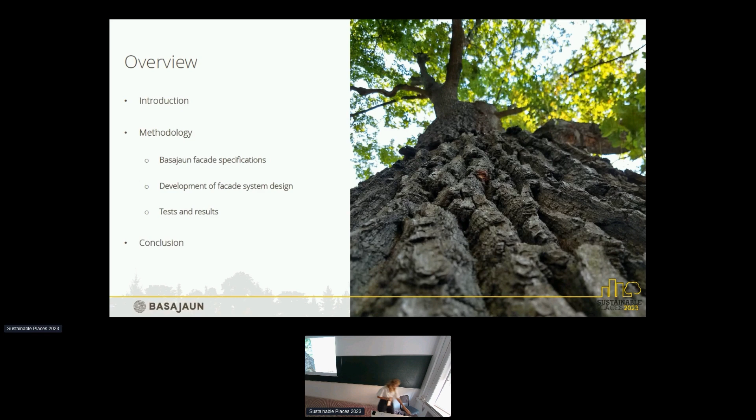Let's start with Basajaun. It's a European project that started in October 2019, and it's towards the end because it will finish next year, in March 2024. It's a really big consortium with 29 partners spread across 12 different countries in Europe. The coordinator is Tecnalia, and the person in charge is Javier Garcia.

In this project, the role of Focchi is to develop a curtain wall facade system including bio-based materials, because as you know, the standard for curtain wall facades is aluminum. In this project, we wanted to use an alternative material for this kind of system.

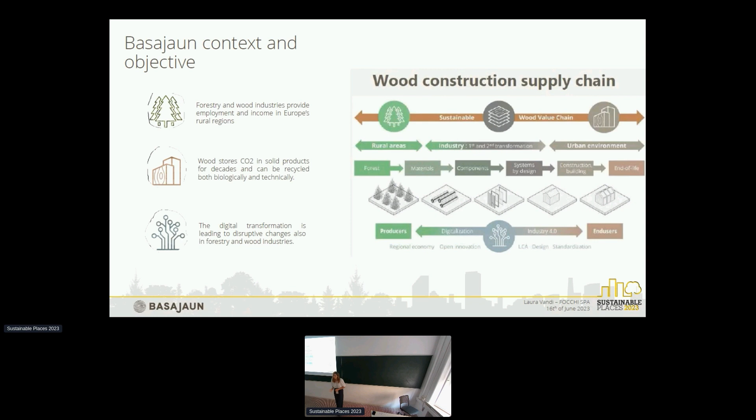What is the objective of Basajaun? It has a lot of outcomes, but the main objective is to boost the use of bio-based material in the construction sector. Today I will talk especially about the facade system, but the goal of Basajaun is to address the whole construction value chain.

In this presentation, I will talk about the innovation we developed, a bio-based facade, and how we will install it in a real demo building.

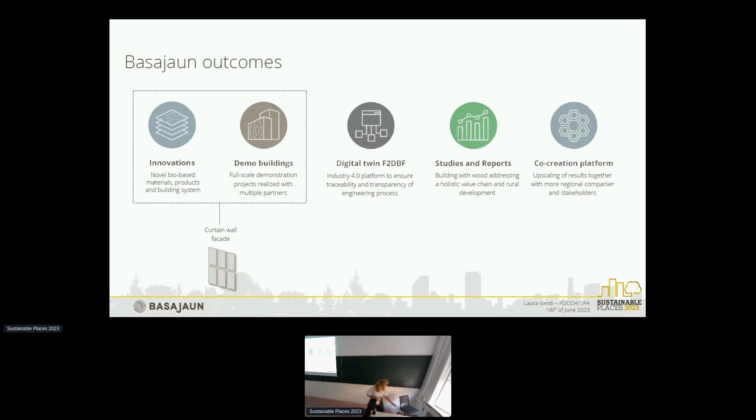Okay, let's talk about the methodology. You can see here how we divided the project. The first phase is the most crucial one, because we identify all the facade specifications - boundary conditions, objectives, requirements, and goals and targets we need to address. Then the core activity is the development of the facade system itself.

The third phase is testing and results, because in order to validate the facade system, we had to conduct tests to validate and verify its feasibility. We conducted performance mock-up, acoustic, and fire tests, but I'll go through all of that.

Just for context, before starting the design phase, we analyzed the state of the art and the needs. We were asked why we need to develop a bio-based component. All of us know that the construction sector has the highest energy consumption percentage, and also 30% of solid waste is due to construction.

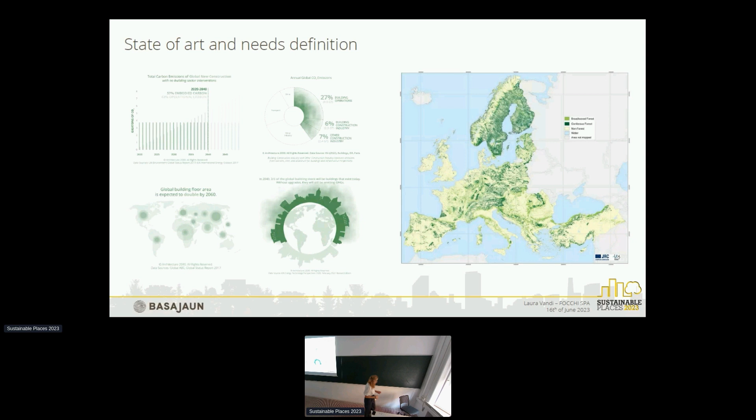So what we wanted to try is to replace or find an alternative to aluminum, because nowadays traditional curtain wall facades are made of aluminum. I'm not saying aluminum isn't sustainable - it has increased its performance a lot, for example with a high percentage of recycled aluminum. But in this project, we wanted to investigate an alternative to aluminum.

What are the objectives and the role of the facade? The facade system is one of the most important building components because it's responsible for the division between indoor and outdoor spaces. It provides safety to people and also gives aesthetic appeal to the building.

We can summarize three main objectives in these boxes. The most important is to industrialize the process and manufacturing of the facade. In the design phase, we needed to consider this requirement to make transport and installation safer and easier, in terms of dimension, weight, and workability.

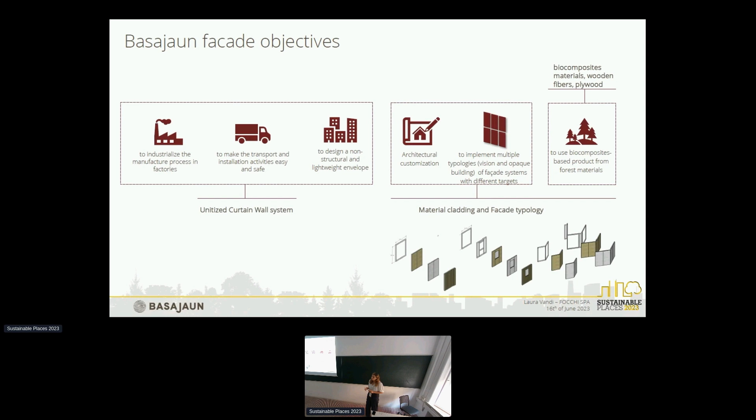The third requirement, as I mentioned before, is to introduce bio-based materials. The second phase analyzes the boundary conditions - requirements that are compulsory to consider in order to address the performances needed across all countries. So we conducted a deep investigation all around Europe.

Okay, let's start with the second phase of the methodology, the designing phase itself. As you know, the curtain wall facade is a lightweight facade system without a load-bearing structure. It has its own frame with perimeters, and it's literally hanged to the ceiling of the building. One of the main important components of the curtain wall facade is the frame.

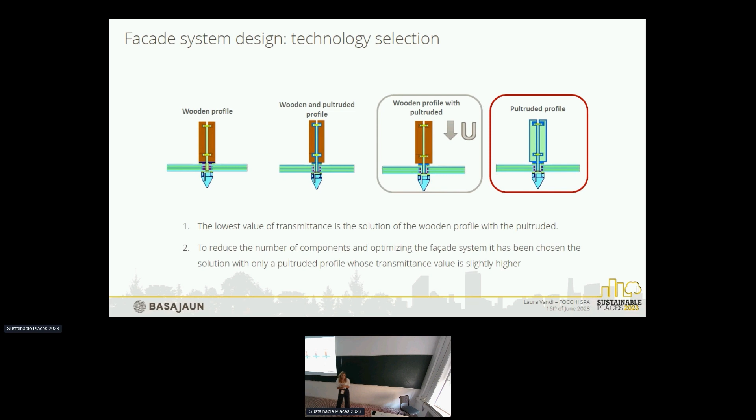But we selected the pultruded profile, because the differences in transmittance values were really low. So we decided, in order to address the requirement of industrialization, to reduce as much as possible the number of components, because if we produce 1,000 square meters of facade, having multiple solutions instead of one single solution will increase cost and time a lot. So it's crucial to understand how we need to address all these requirements.

I want to spend some time on the bio-based component, because this is the most innovative part of the facade. On the right, you can see the section of the bio-based component, manufactured by a Hungarian company together with Amplas and Omicron, two partners of the consortium. After trying a lot of materials, this is the final composition.

This profile, the section of which is really similar to the aluminum one, has some differences, but we could use it as a profile for the curtain wall facade. It's made of wooden fiber and basalt fiber for 60%, and these fibers are kept together with resin.

We wanted to increase the percentage of bioresin a lot, but this is one of the features that will be improved, because in this part the resin is not just bioresin. We needed to add some plastic as well.

Another difference from aluminum is that this profile is not extruded, which is a really high energy consuming process, but pultruded. It's a continuous process that starts from bobbins of fibers. They are kept together, pass through a bath of resin, then through a matrix, and then they are cut. So it's a continuous process to make these bars.

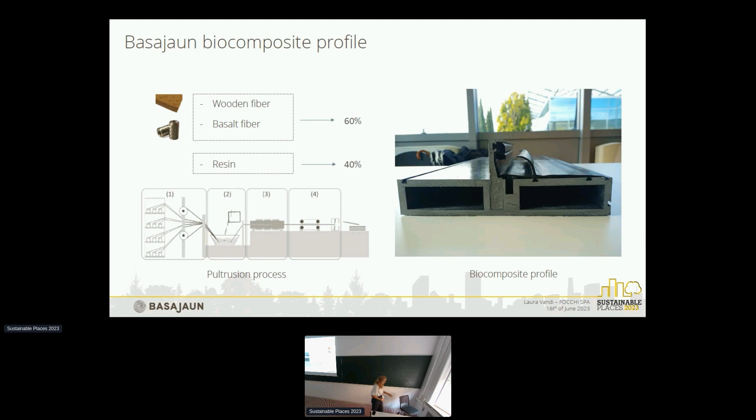The main concept is a structural frame, and from the indoor to the outside we have a plywood which guarantees the fire performance, because we wanted to use just a membrane as a vapor barrier, but we needed this component to address all the fire regulations, since complying with fire requirements was one of the main issues when working with bio-based materials.

So from the inside, we have a plywood, which has fire reaction class B1, a good material. Then, instead of using mineral wool, which is standard for curtain wall facades, we use wooden fibers, which have a really close thermal characteristic. Then we use a membrane, a ventilated cavity, and the cladding. It's a series of layers in order to comply with all the requirements.

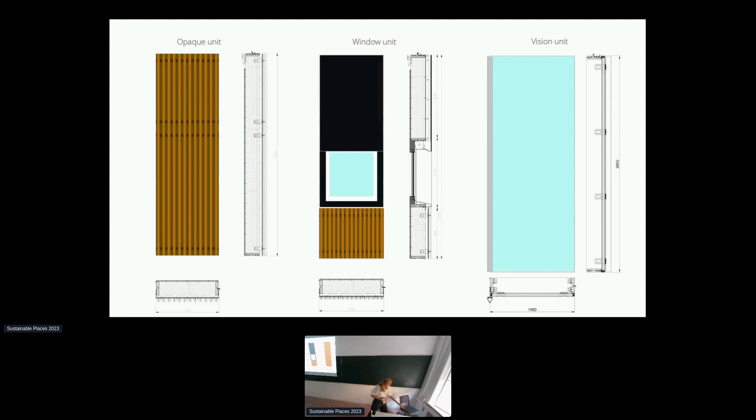Some pictures: in the lower part there is the vision one, in the upper part there is the opaque, right and left, and in the middle there is also the window unit.

Particular importance was also given to making the cladding interchangeable. The opaque presented some wooden lamellas for the French demo, while on the right there is another kind of cladding, a wooden deck, for the Finnish one.

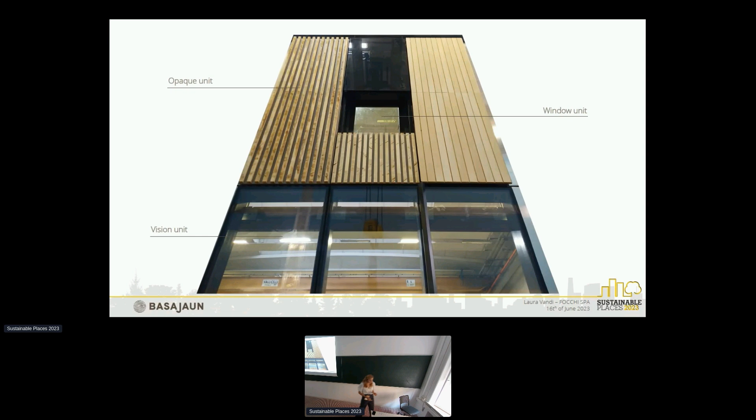And of course some simulation, mechanical simulation, in order to validate the system. ENAR, one of our partners, took the biggest and heaviest facade module in order to verify the mechanical behavior of all the components.

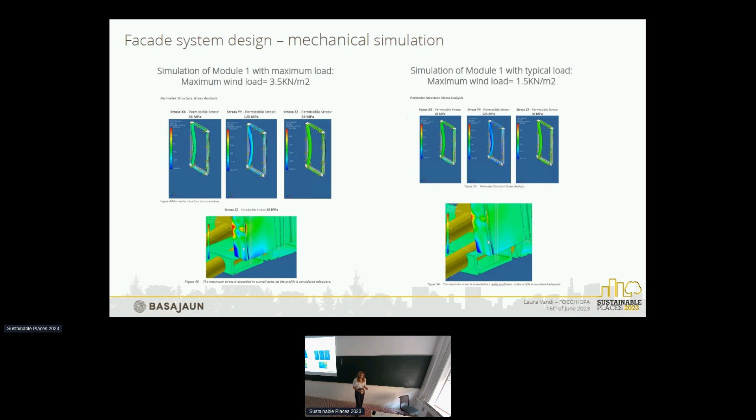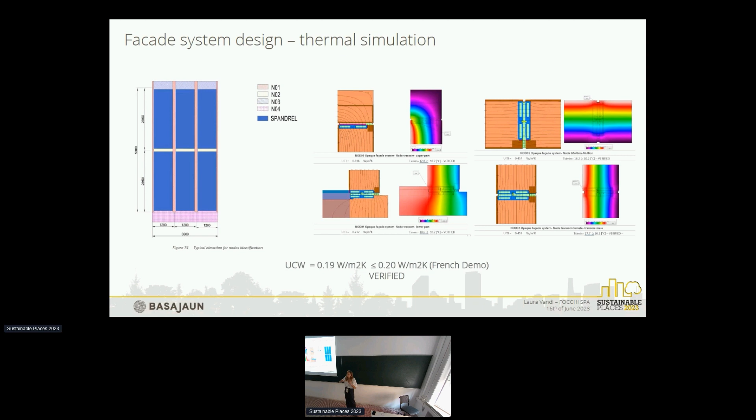And again, also some thermal validation. We took the middle section, but also all the nodes, in order to understand the thermal behavior of the system.

Here you can see the demo building developed by Studio, an architectural firm based in the Netherlands. They designed the Finnish demo as a cultural building, while the French demo is a residential building. We wanted to demonstrate how this solution could be applied to different types of buildings.

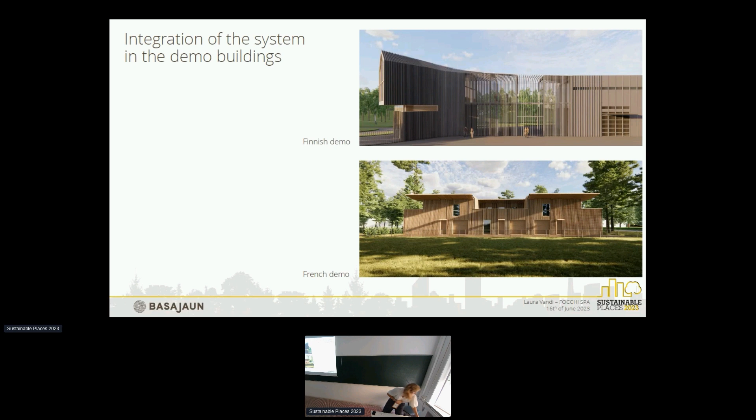The third and last phase, of course, is that once we had designed the facade solution, we needed to validate and test it. So here is the first prototyping phase. I'll just briefly summarize some of the main steps without going too deep.

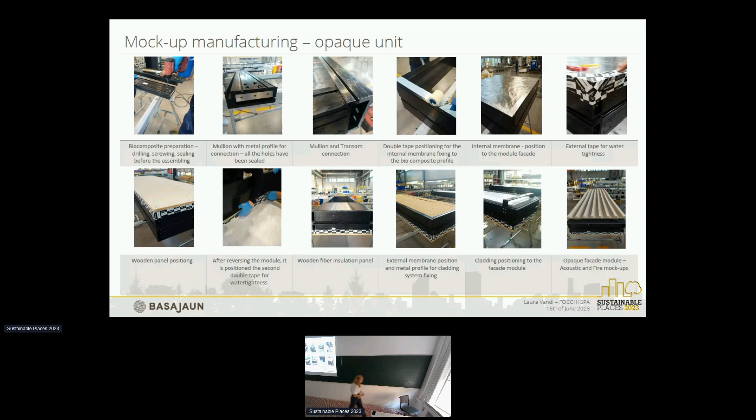In this slide you can see the wood fiber filling the facade module, for thermal transmittance of course, and then the cladding. In the next slide there are the final configurations of both typologies, the opaque and the vision one. The first test we made is the performance test.

The performance test has been conducted at Istituto Giordano, an accredited entity based in Italy, close to Focchi. We designed the performance mock-up to test all the different possible scenarios, so we wanted to understand the behavior of the facade module at the junction between window and vision, and opaque and window.

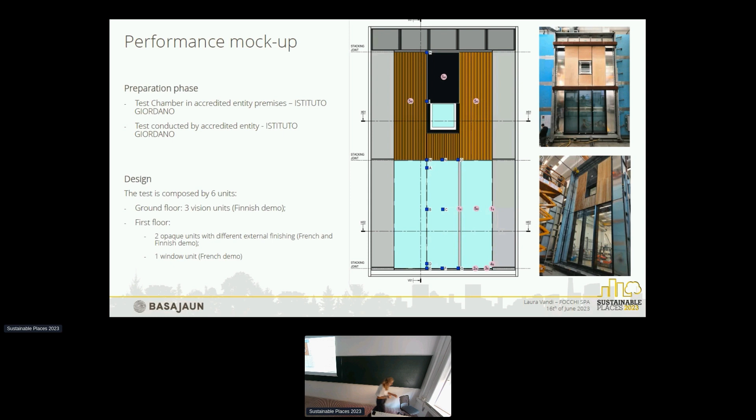So it's tested in order to comply with all the scenarios we could have in a building, vision in the lower part and opaque in the upper part. These are the results. We comply with the standard norms, the 13830 European standard for curtain wall facades. Since this system is considered a curtain wall facade, we needed to comply with it. These are the results, and we pass all of them. What we tested is the air permeability, the wind load, the water tightness, and also the impact.

So it was really important to guarantee the safety for people in order to avoid any falls or damages.

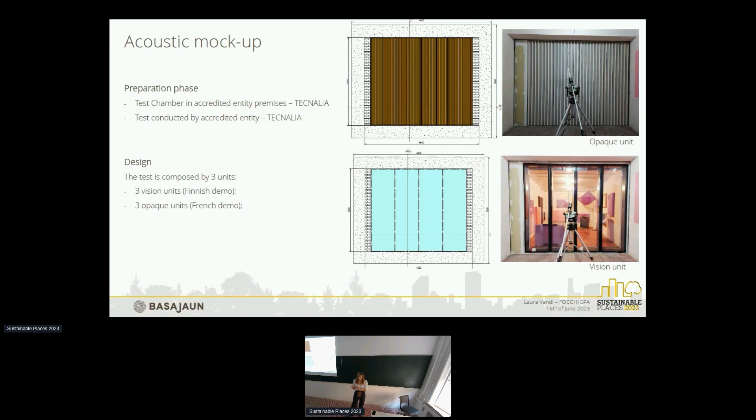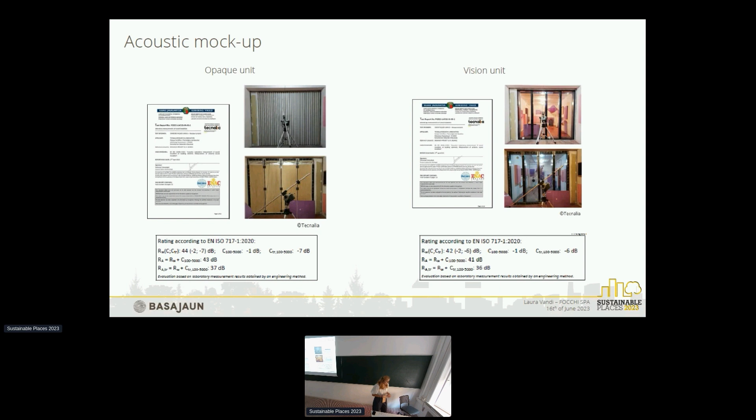The second test we made is the acoustic mock-up for both the vision and opaque parts. This test was conducted in Tecnalia, and we made different tests, one specific for opaque and one specific for vision, and this is the result. In France, we didn't have a really high requirement for acoustics because the demo mock-up is literally in a forest, but in this case we comply with all the requirements, so we were really satisfied.

The fire mock-up, as I said, the fire was the most critical part. So we needed to conduct 3 different tests: the fire resistance, the fire reaction, and the spread test for the facade. You can see some pictures of the results, and these have been conducted for both.

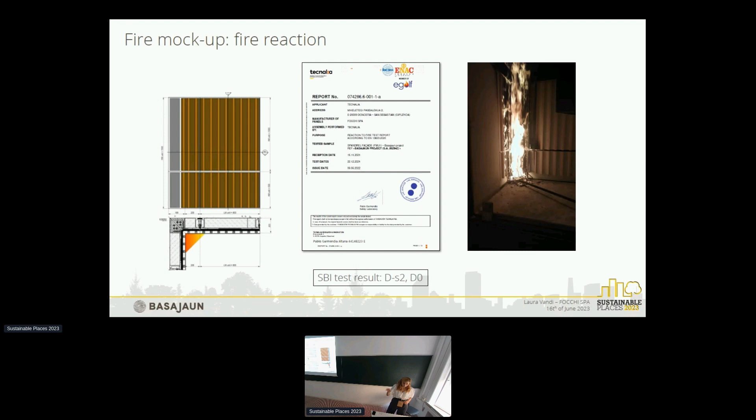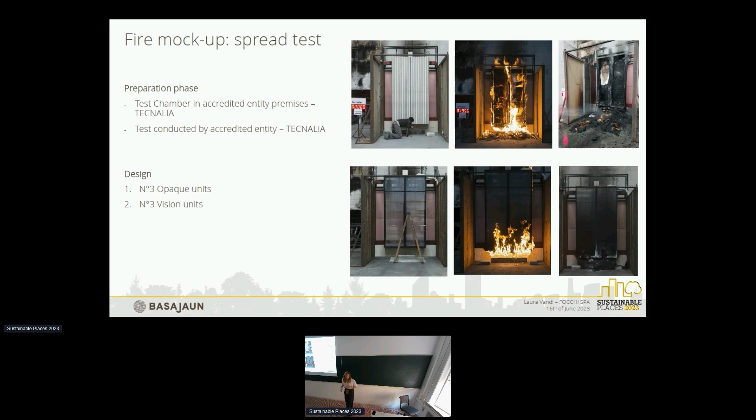But in this slide you can see just the opaque one. This is the fire reaction, the SBI test. It's different from the other because it's made in a particular middle furnace, and the fire goes toward the external part of the facade, while the fire resistance test goes from the internal towards the external part. And here is the spread test, showing how the fire could propagate vertically from the external part of the facade.

So, let's get to an end. We can say that all the results we achieved are completely in line with the facade expectations. We addressed the industrialization, both for the manufacturing line and for the installation part. This facade solution is customized because the cladding could be changed. The same solution could also be applied for different facade typologies, and it is made of various components. So we can say that we are satisfied and we addressed the objective.

Of course, in order to improve, we wanted also to look forward and see, okay, this is the facade solution, but what can we do next, what can we improve after all this process. There are some features we wanted to improve: for instance, reducing the cost, because if we want to scale up the solution, the cost has to be reduced. Also the weight and thickness, because weight is really important for manufacturing — for instance, aluminium, a 4 meter long piece, can be moved by 1 person, while the bio-based component was heavier, so we needed 2 persons to move it. These are all considerations we need to keep in mind for further development.

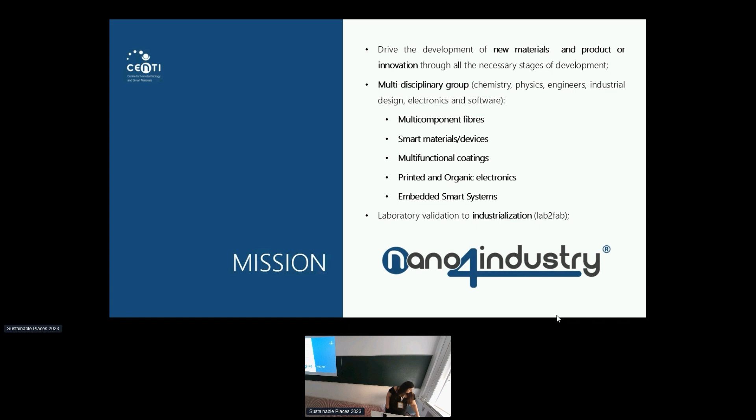As I mentioned, we aim to promote activities around smart and functional materials and systems, and we work with multi-component fibers, smart materials and devices, multifunctional coatings, printed and organic electronics, and embedded smart systems. We also have a lab for prototyping and industrialization of our developments. As a multi-sectorial research center, we work with almost all substrates imaginable: paper, textile, wood, concrete, cork, polymers, ceramic, and everything in between.

Our focus is on materials for sustainable industry, microfabrication and printed intelligence, novel sustainable composites fabrication, and our pilot lines that allow us to upscale our developments. Also nanostructured solutions, energy storage and microgeneration, and automation and software.

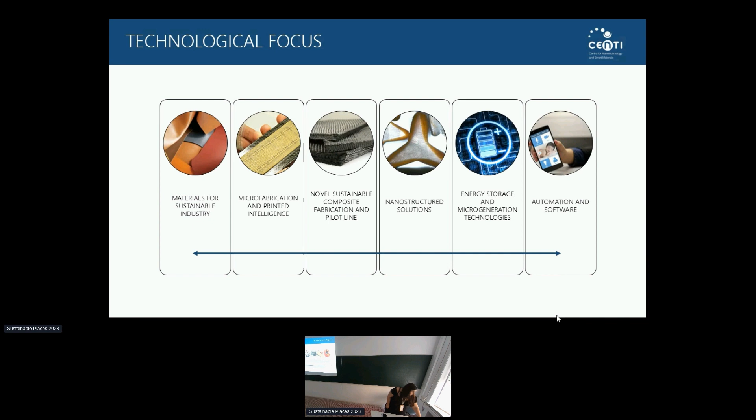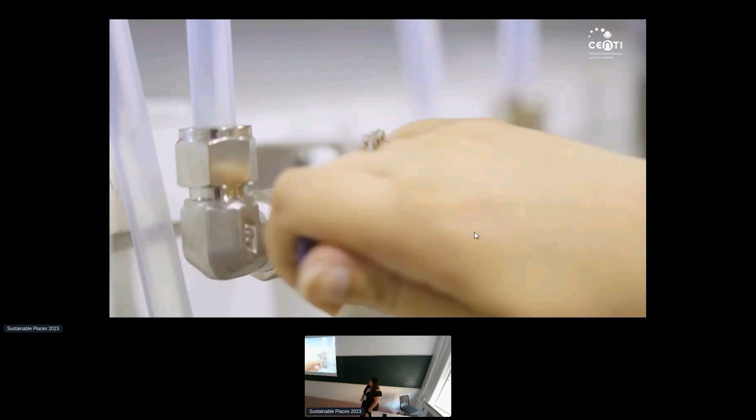I have here a small video about some of our technical capabilities. Here you can see our reactors for small-scale synthesis, our characterization equipment that allows us to validate our results—this one shows results on the skin—our pilot scale reactors, our spray coating line, some of our developments, the plasma technology that allows pre-treatment of materials, and our simulation laboratory that allows thermal studies on materials, simulating the human body inside a climatic chamber.

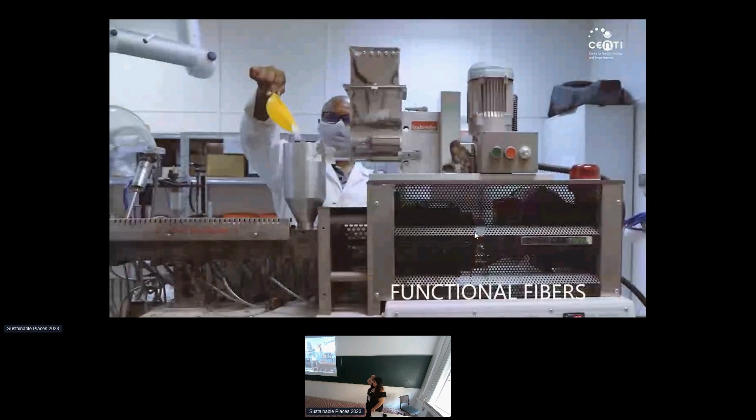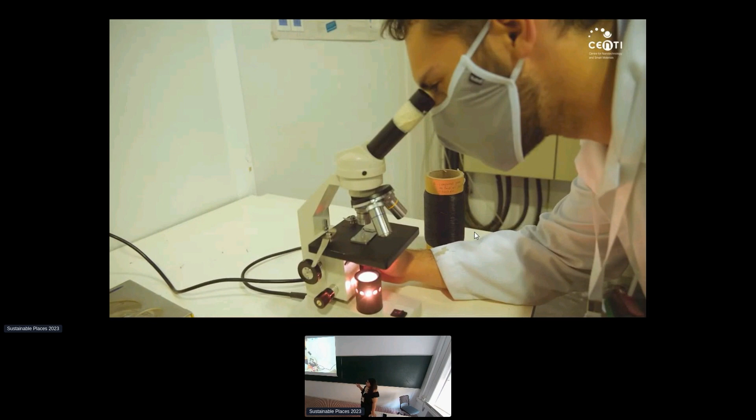We also work with functional fibers and are able to additivate the polymers, which we can then extrude or use to produce fiber. The fiber can be a three-component fiber, and we can also produce polymers for different kinds of extrusion.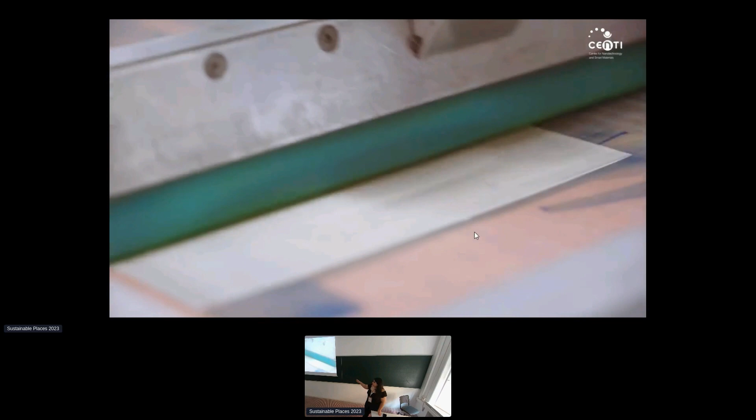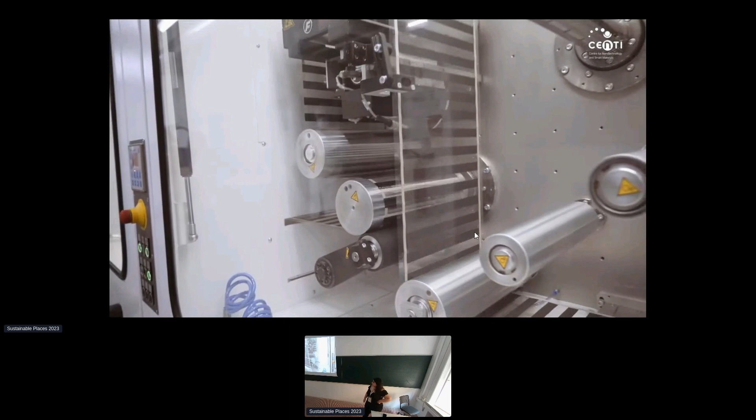We also have smart materials that allow us to do printed electronics and physical deposition of materials. Here we are seeing the preparation of flexible electronics, and we also have a line to allow us to upscale the developments. In terms of non-flexible electronics, we also have the ability to do the hardware and software that accompanies some of our projects. Here we are producing the PCBs that go inside the equipment.

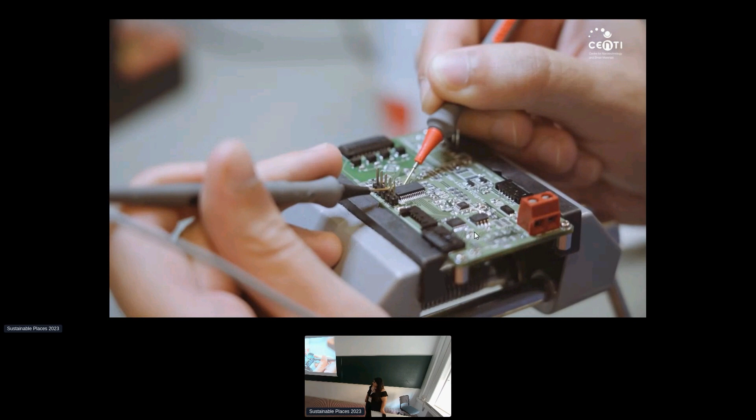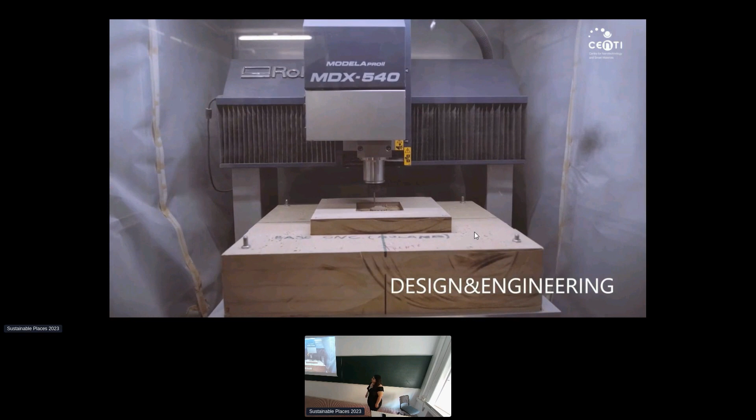And our design and engineering lab has the equipment needed to do the prototyping and production of different demonstrators for our developments.

In terms of numbers, at the moment we have more than 150 collaborative researchers with more than 117 projects running. We have more than 250 active clients, 52 active patents, 20 joint ownership applications, and 5 CENTI ownership applications.

This will allow us to build construction blocks outside the place where we are doing the construction and then bring them there. In this way, we can use more robotic labor and are less dependent on the resources available at the construction site.

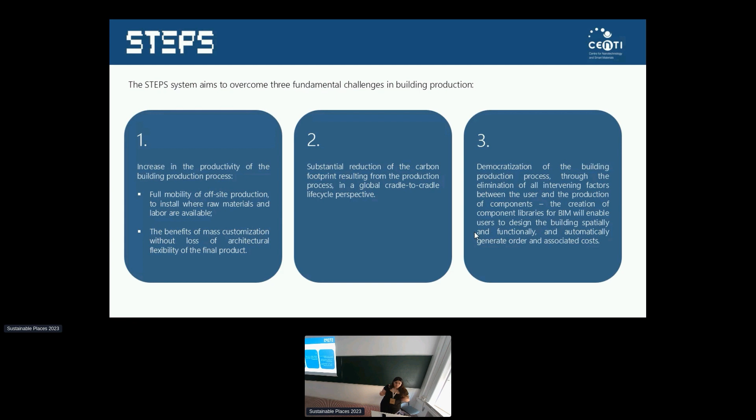We can have a substantial reduction of carbon footprint, which we are trying to achieve using more sustainable materials in construction, and also democratization of the building production process, where we are going to create a components library of BIM, and the user can build this house like we used to do as children building houses with Legos. We can do something similar, and with that automatically generate an order and associated costs, and then the house is shipped to us, and we just need to set it up.

For the interior, we had two OSB layers and the nucleus. We tested two different structures: a monomaterial structure and a laminated structure. We started testing the monomaterial, then tried to laminate it with different materials to try to increase the results. But due to the need for mechanical stability, the laminated facades need to be very small and don't produce the best results.

We also tested different materials. The standard EPS that we are trying to replace, because it was the first material identified for this block. So we studied recycled EPS, done completely with recycled traditional EPS, recycled PET, and EPS Neoplas, which is a recycled material with components of recycled EPS and graphite. We also tried cork, recycled cork, and hemp.

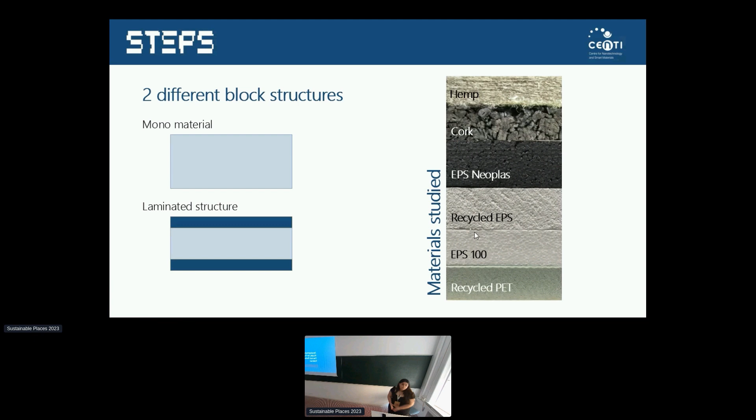So to see which of those materials and structures would be better suited for building the block, we developed a numerical model for predicting thermal performance. Using ANSYS, we developed three numerical models.

Besides that, we also did a 3D model of a room. For that, we used a room with dimensions 4 by 4 meters with 3 meter high ceilings. For this one, we used heat transfer forms of radiation and natural convection, because from our experience these are the most significant ones for this kind of model.

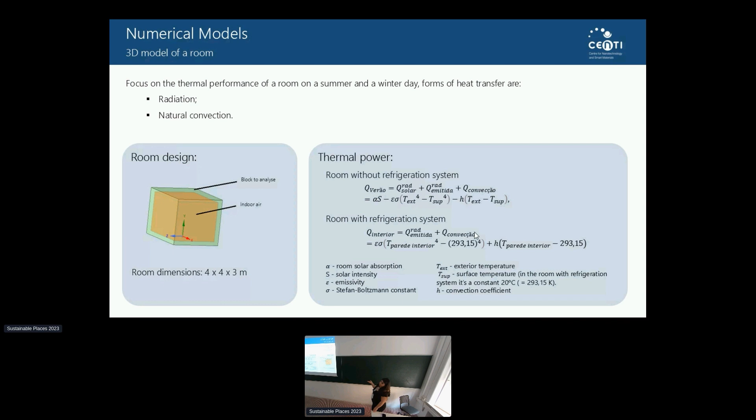In this 3D model, we did two variations: a room without a refrigeration system and a room with a refrigeration system. I'm going to show the results we were able to obtain with the room with the refrigeration system, which allows us to determine the power needed to maintain the room at a temperature of 20 degrees.

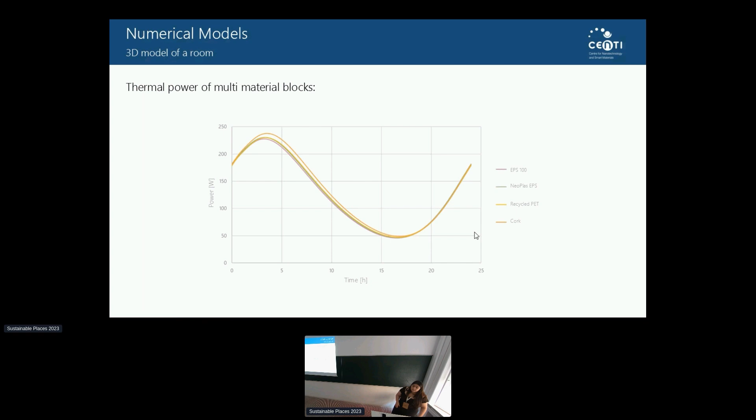We are almost at the end of the project, so these are the results we were able to attain with this simulation. The results were also validated using a methodology we developed at CENTI, which with our climatic chamber allowed us to validate these results. We were able to assess that this material was better than the traditional EPS alternative.

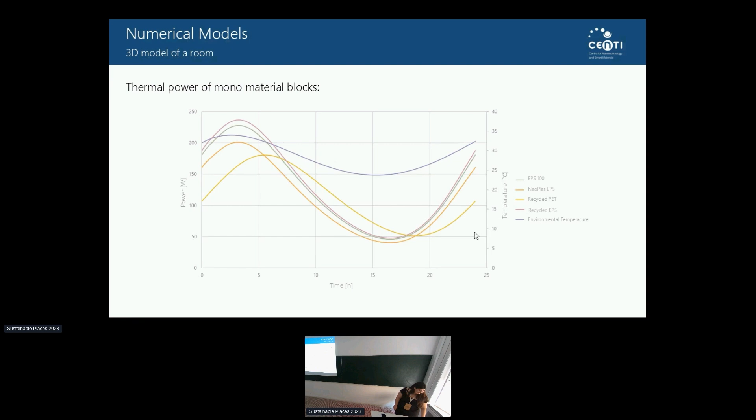Question: Did you do any comparison for price? Yes, we did. The Neopor is slightly pricier, but the company was okay with that. Recycled PET has an even higher price and even higher weight, so the company ruled it out. But the difference is very slim.

So right now the material is being manufactured? Yes, we are doing the demonstrator. Do you have certification of the material, or is this ongoing? The certification of the block as a whole is ongoing, but the material itself, the EPS Neopor, has a fire class A rating, is water resistant, and does not biodegrade, which was also important for the house. The material itself is certified, and we also did our own tests for mechanical characterization.

Another question: do you think that if you change the size or morphology of the module, you can expect better results? Have you made this kind of simulation? We did not have the flexibility to change the structure of the block itself. For example, if we increase the width of the block, the results would be better, especially for the laminated version, because we have a very small laminated width. But the company felt that would increase the difficulty of construction and transportation.

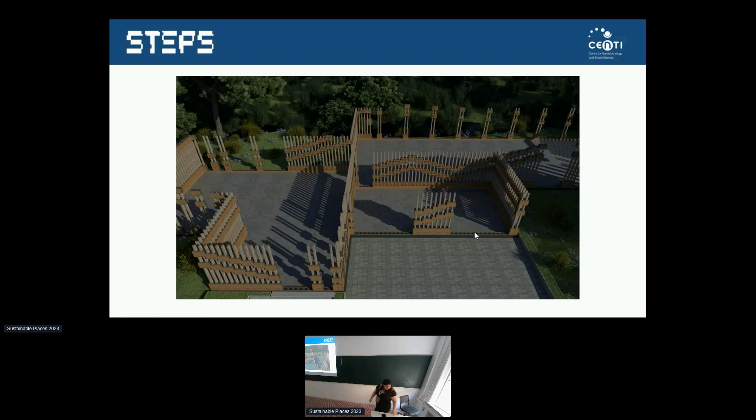But in the junction between different elements, is there nothing providing pressure? No, this can be set up and dismounted with no problem. Water penetration and water tightness is guaranteed by some steps, so they are connected together. When stacked one above the other, they have an indentation that allows them to stack together like Legos—literally like Lego blocks.

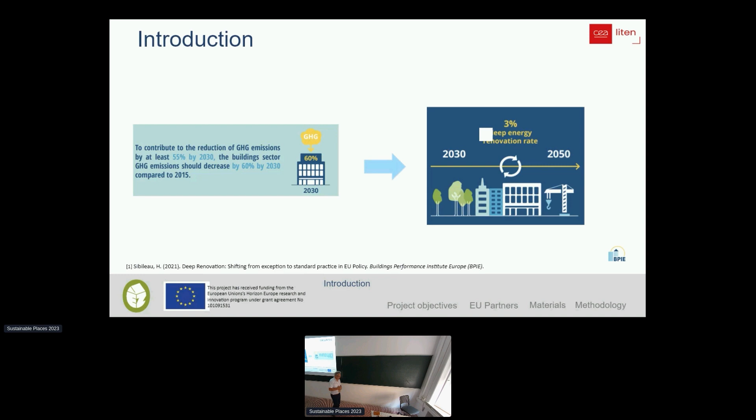So the idea is, we plan to contribute to the reduction of GHG emissions, so we say at least 55% by 2030, but at the end we would like to have some zero carbon buildings by 2050. That means a lot of work and a lot of evolution.

Because we are working also in a solar lab, the idea will be to reduce consumption, but also to increase renewable energy, solar, and we would like to have this kind of zero carbon building renovation.

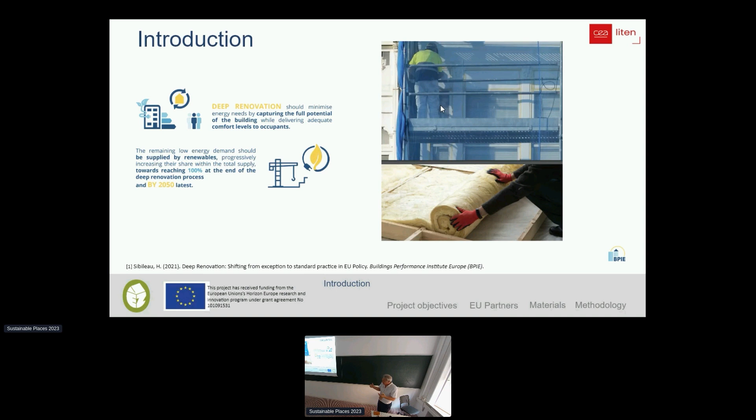That means a lot of insulation, but also PV, and we choose second life PV, because if you want to have a very low carbon footprint, you need second hand PV. Otherwise you will use a lot of carbon also for the PV.

So it's a huge goal, and for that, what we managed was to put together a lot of companies, and we will test the different products. We will see how we can renovate, have a wall component, and the issue is: is it possible to have a real component at the end of the project? That's what we will see during this presentation.

So the different kinds of materials - some are well known like wood fiber, or even VOC paint is more and more known, and insulating filled accessories, some insulation in brick. But we have also some new materials like...

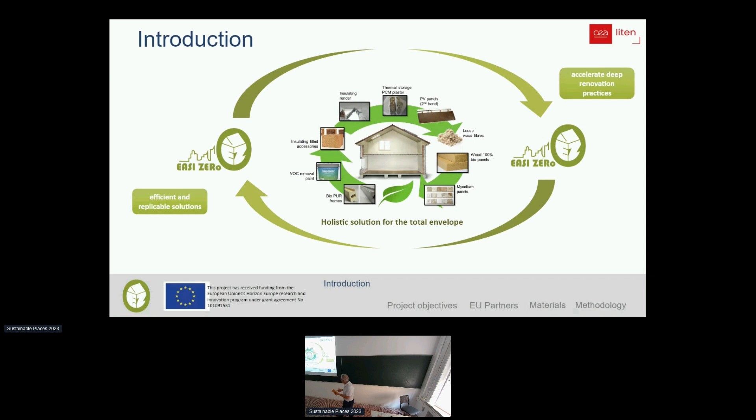Miscanthus. So miscanthus is a very strange material. You can smell it at the end, you will see. But we'll talk about that later - it seems very interesting. Then I have some more wood fiber, and also you can see biopanels - also about a little later.

The idea is: how can we have this low carbon material for the total envelope? That means we need all these materials.

We will work to test how we can have some components. Perhaps we will have different components at the end of the project. We will use different kinds of materials. Some materials help for the insulation, some others help for health.

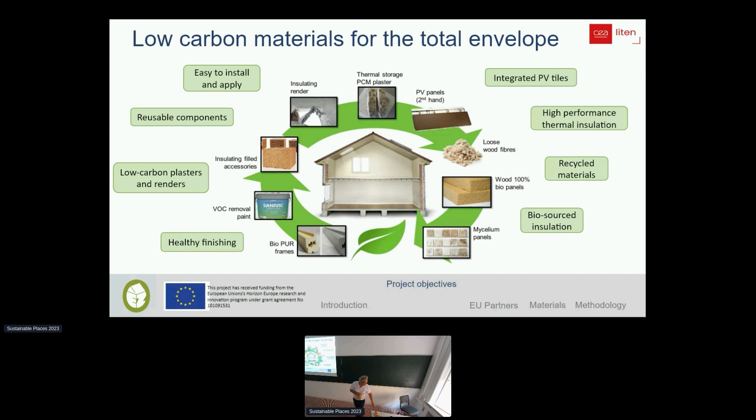So again, the idea is to have some package of insulating materials for renovation, and we plan to apply this to a lot of different climates.

Here you have the different teams, and you can see that we have a lot of different teams from a lot of different countries, from universities, research centers, some startups, some SMEs. So the idea is: is it possible to propose something with so many different countries and so many different objectives with so many manufacturers?

You know that usually in open projects it's difficult not to have a nice project, but at the end of a project, to have something where different countries can work together - I don't have an answer for the moment.

So just to show you the different kinds of material: I told you about mycelium, which is something very new and I hope interesting. Wood fiber, you know, it's more known. Biopolymers, I even have some new ones I didn't know about before the project, but it seems very interesting for the windows, and if I knew that, I would like to have it in my home.

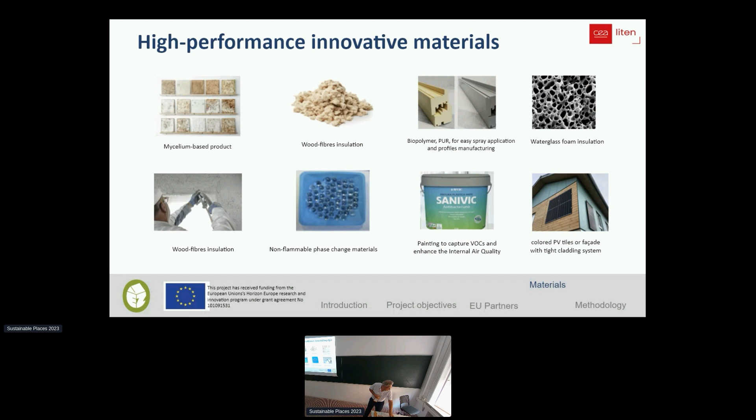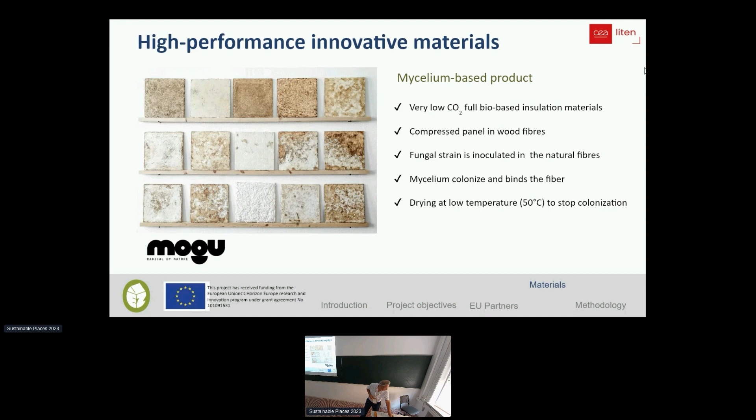I told you about some very strange material, which is a mycelium-based product with very low CO2, and we can put it in wood fibers. Seems very interesting. The idea is you have some colonization, and you need a process with drying at low temperature to stop this colonization of the mushroom insect. Mogu is a small startup who plans to develop this product, and again we will see what can happen. So how do we manage the project?

We have 3 scales. The first scale is to work at the lab scale, with this kind of startup or research center more focused on materials, because it's a project which mixes that with a research center more focused on building construction. The idea is to have something at these different scales, from the material to the building.

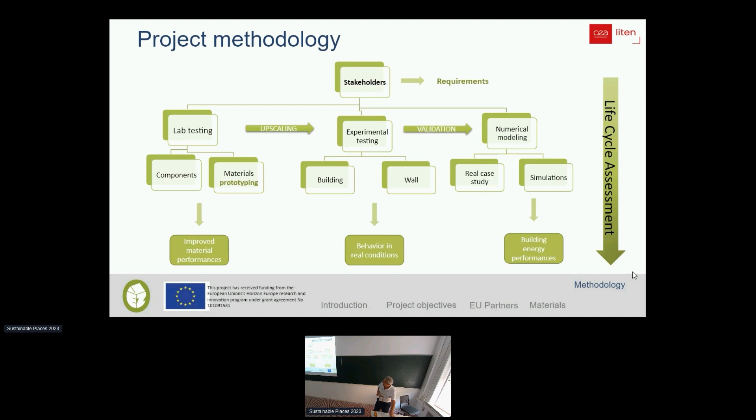We will see different experimental testing at building scale and at wall scale. We don't plan to have a demonstration at the end because the TRL of the project is low, but we will have different real use cases. And when we get the first results at experimental scale, we can see by simulation where we can go further.

Then another idea is at the end of the project to have an EASI ZERo community, with a lot of stakeholders. That's a very interesting idea of the project. It means at the end of the project, we will not just say, yes, we have a fantastic new material with, I don't know, mushroom and biopolymers and something like this. But we have a community, and we plan to have a lot of different kinds of people in this community outside of the project, and we already have a lot of people interested.

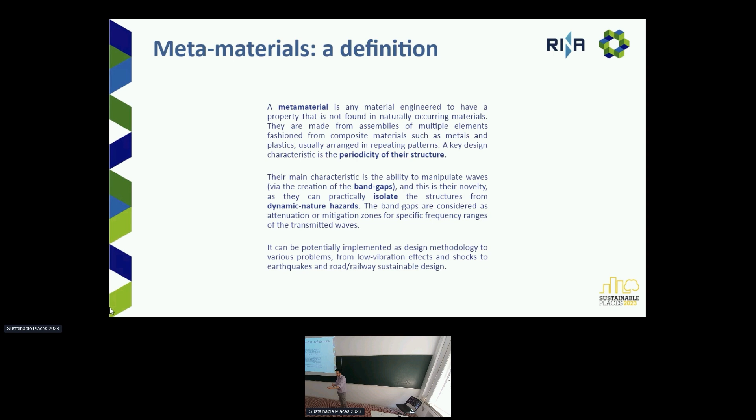So what we have to do, in simple words, is firstly to define the frequency range of our waves and our hazard. That hazard may be a seismic one, a blast hazard, or any other dynamic nature hazard, and then design our structure, our metamaterial, to block these frequencies.

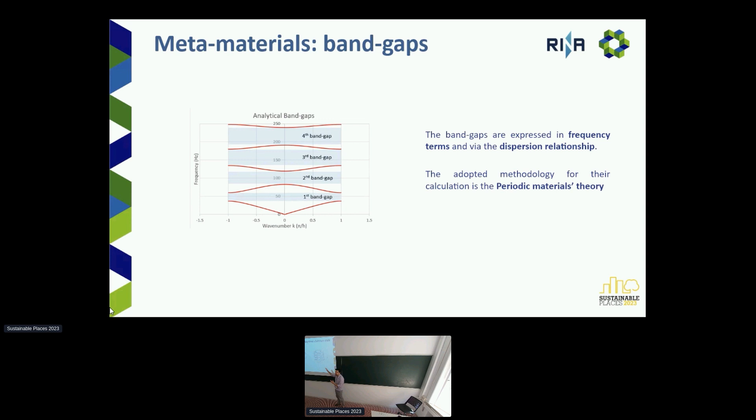With the red lines are defining the frequencies that are allowed to transmit without problem through our medium. So we need to focus when we design a metamaterial to have the desirable band gaps on the frequency ranges that are of our interest.

Very quickly, this theory is exploiting the equation of motion for its layers, and we're using the boundary condition. The main, let's say, characteristic of this theory is that we're exploiting the Bloch-Floquet theorem. The Bloch-Floquet theorem is exactly a boundary condition that allows us to exploit the infinity of this structure.

So with the Bloch-Floquet, we're considering that this unit cell, which is the 2 materials, are working. We're assuming infinite unit cells, so infinite layers of these materials. And what I want you to keep is this dispersion relationship.

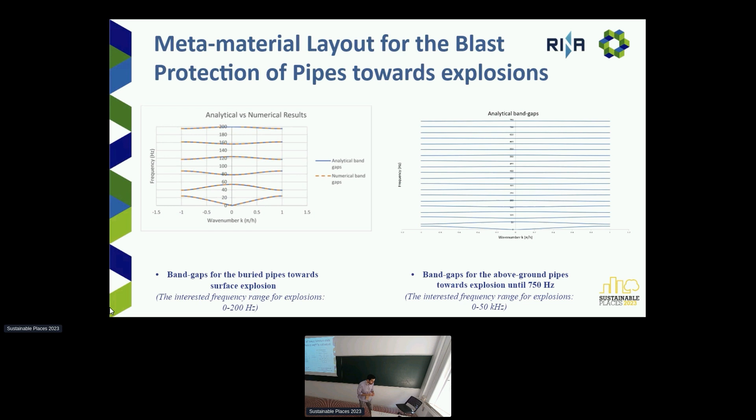We have better performance in the end, better results, but our band gaps are not tackling exactly the total range of the free transmissive frequency values for the blast waves. So we have made a numerical analysis in Abaqus for various explosion scenarios, mostly of low to medium value of TNT quantity, because for explosions of higher magnitude, like a bomb or an extreme terrorist event, we can't offer feasible solutions for effective protection.

But for low to medium scenarios, maybe for damages on an urban level, where bombing and huge explosives are not the common dangers for energy infrastructures.

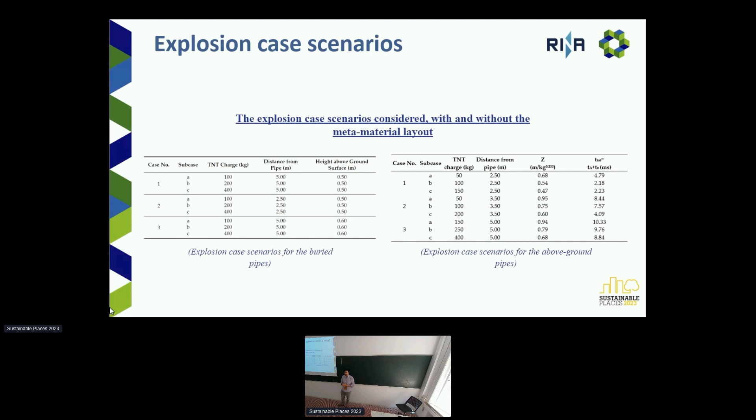We can see that we are varying from 50 kilogram of TNT until 400 kilogram of TNT, and for distances near and close to our pipe, because if we are simulating the explosion right 0.5 meters above the pipe, then only from the destruction of the surrounding soils we will have tremendous displacements.

Of course, we can mention here that the buried pipes from the beginning are not having extremely big displacements, let's say it's on the magnitude of 8 and 10 millimeters. But these are serious ones regarding the response of the pipe, because we must not forget that we're talking about pipes underground, buried, which are also having the loads from the soil.

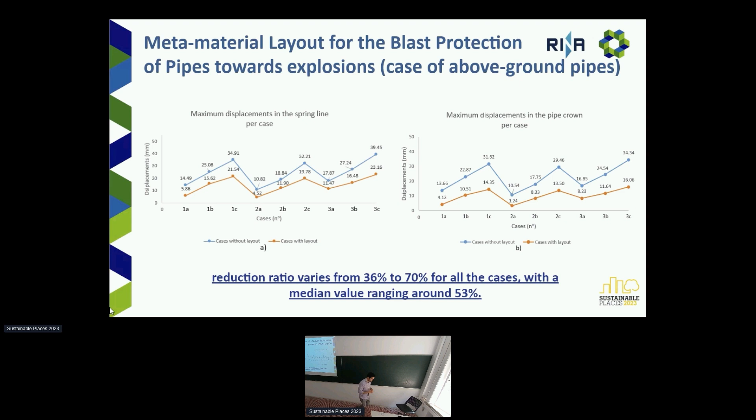And here is where we will try to integrate these concepts and this philosophy into the general context, try to be interdisciplinary, not offer only one solution out of a general context.

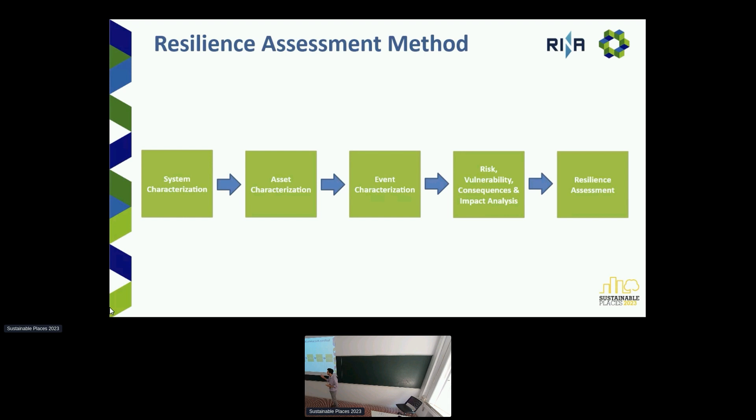Here is a resilience assessment method that we are using in RINA, and it's a 5-step methodology with system characterization, asset and event characterization, the impact analysis, and finally the resilience assessment. Just briefly, it's a classic type of resilience assessment method.

Firstly, we need to collect various information about our system. Which type of system is this? Are we talking about energy infrastructures? Are we talking about transport? Are we talking about nuclear plants? All of these need to be part of the first step of our method.

Then we're delving into more technical details of our asset, like geometrical characterization or mechanical characterization. Of course, if we are talking about resilience on other systems, it's also organizational or economic characterization of the asset. And then we're proceeding to the event characterization. This is a very crucial step because based on this step, we will develop our risk scenarios, our risk assessment, our probabilities of the hazard.

Of course, this step is not targeted only on one hazard, but we also have the option of considering multi-hazards during the design of our resilience strategy and our strategy towards enhancement of the resilience capacity of our asset or system. Mainly we have two types of hazard: natural hazards, meaning earthquake, wind, floods, mostly related to climate change, and man-made hazards, human error, terrorist attack, and more recently cybersecurity events. So the definition of the relevant hazard scenarios is really important for the accuracy of the resilience assessment method, and for this we need reliable literature and data.

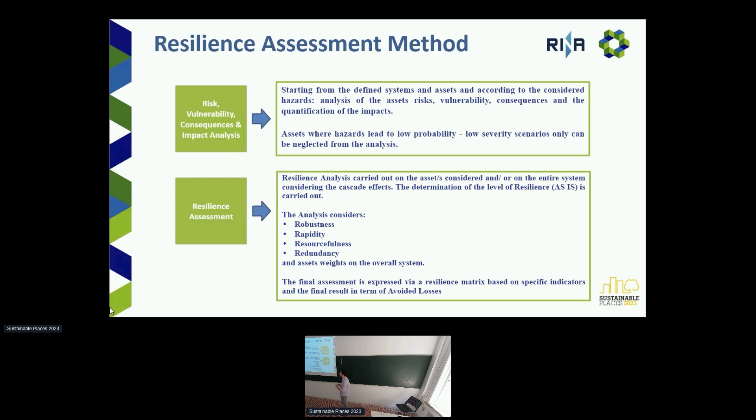Try to translate a resilience analysis into quantity values, and see how we can improve these values by making certain attempts and reinforcements on our system or asset. One way to do this is, of course, metamaterials, as we said before, because with metamaterials we can offer protection toward dynamic nature hazards, which have high destruction capability for our structures. And they can offer protection sometimes not explicitly for one hazard, but towards multiple hazards, like both for blast hazards and vibration hazards coming from a nearby railway, for example.

So what we are trying now to develop within RINA is to implement metamaterial concepts towards our asset in a way to improve and enhance the resiliency capacity of our asset, and then through comparative studies with and without the presence of the metamaterial layout, like we did previously in the pipe, to see how this secures and covers the vulnerabilities of our asset and system. And then finally, the resilience assessment will be translated also into better values in the final resilience assessment.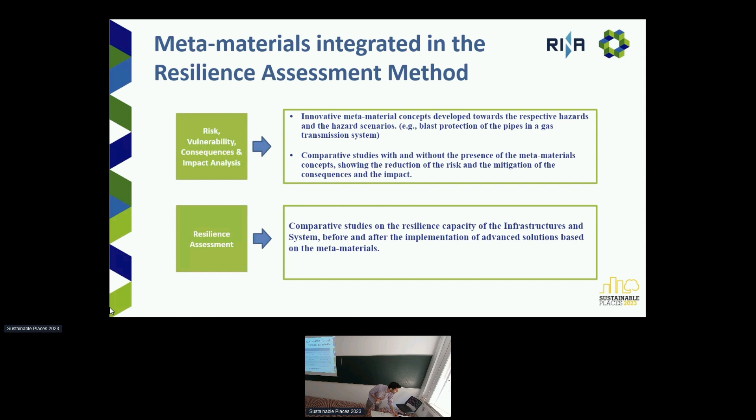Some potential meta concepts of today and the future, because this is a design philosophy that, regarding civil engineering practice, has been developed mostly recently, over the previous decade. So already we have imagined some concepts, but we haven't succeeded in completing these studies. There is a huge interest worldwide, I believe, or I want to believe, for this design philosophy so far.

Some extra metamaterial concepts can tackle various hazards like surface and underground explosions, underwater explosions for offshore wind turbines, and seismic protection of city buildings. This is also a field where we have much literature offered, but also for energy infrastructures like electricity and nuclear plants. For some of these concepts we already have literature, so if you want to delve more into this, feel free to contact me, because from the rest of the consortium we have really interesting concepts on this.

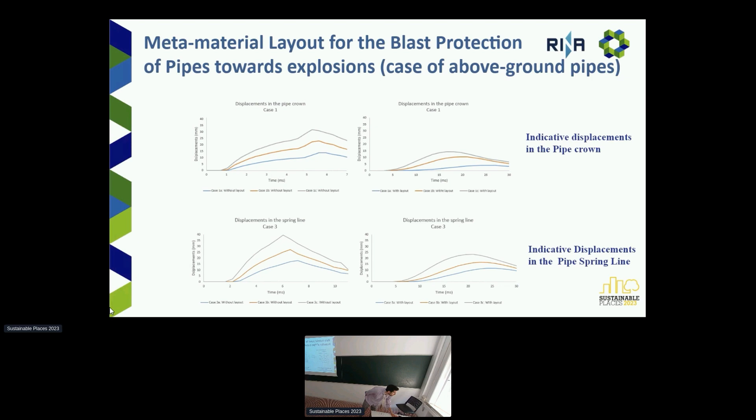Okay, yeah, I will go back here. It's not so much a matter of interfaces. We try to have as many layers as we have because we are considering that the medium is performing and behaving as a continuum medium. So we don't do anything special on the interfaces, because the boundary conditions are for interfaces working in accordance with one another, meaning that in many ways they are bonding together, so we consider that they are working as one medium.

The theory behind this is that we consider an infinite number of layers, because the theory of periodic materials is expressed for infinite layers. But in reality we can't have infinite layers. So what is of our interest? If we have at least 6 or 8 layers, we consider that we are closer to this behavior of the infinite structure. And the thickness is not a matter.

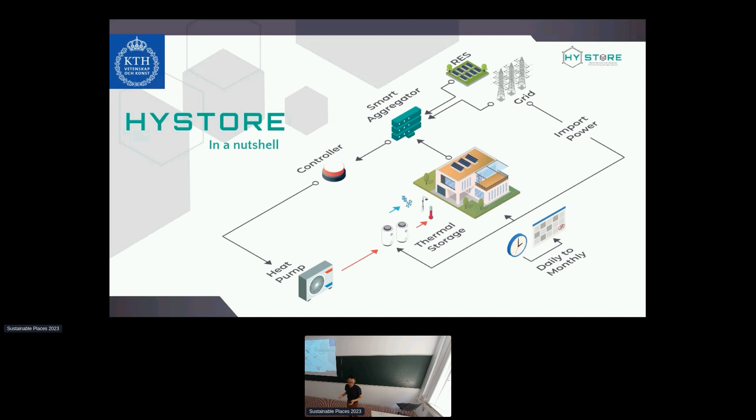The overall goal of this study is to explore new methods to control the energy system within thermal storage. The first is to use different machine learning models from component level to system level. So far a lot of machine learning methods have been explored at the component level, low-level controllers, but now we want to scale it up to see if these methods can be used on the energy network as a whole, not only HVAC or the component, but at scale.

The second motivation is to generalize the machine learning model, because so far most of the models we have been using are designed for one solution, one component, or one manifold like floor heating. We want to generalize the data and data-driven models to see if we have a better framework that can work with different components and different requirements, with just small adaptations. The model framework is there so we can use it for simulations.

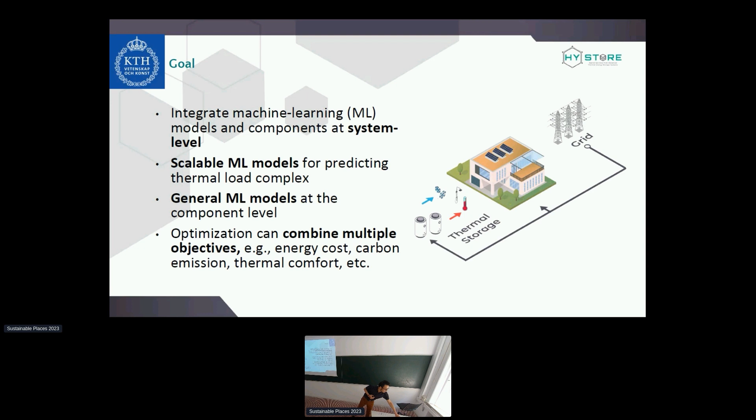So here is a flowchart. We have been working with the concept of a control approach using limited inputs like weather data, temperature data, solar radiation as minimal inputs needed for the model. Then we take a PCM model with a heat pump, combining this using an optimization algorithm to see how this can work using more data-driven approaches, and what the control actions would be in terms of the thermal storage state of charge, heat pump performance, and potential grid contributions.

So basically the scope is to combine different component models and put it in a data-driven model, to see how advanced control can be performed and how well it can be done on a real data set.

We are aware that many studies and projects have worked on this, particularly for load predictions, because to understand how the energy network works, we need to understand the load - that's the first step. But when it comes to electricity load, there has been very advanced development and research, especially in academic environments. Many studies have been done for load predictions, but electricity load and thermal load are a little bit different. We know methods like ANN models, CNN models and different models have been developed.

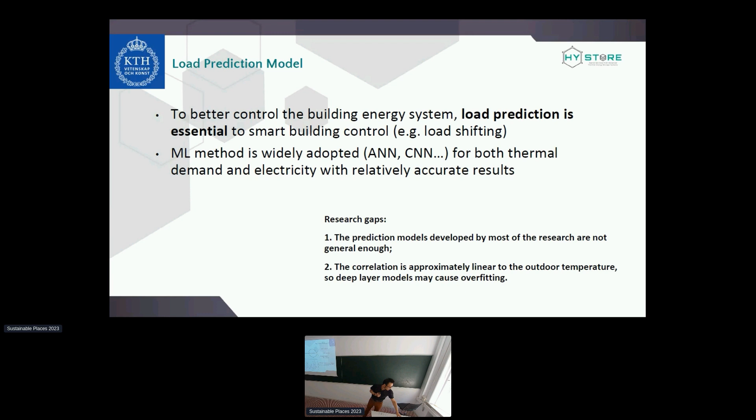So here are some challenges we want to explore. I'll give you some examples of the load prediction model we have been developing. At the core is a prediction model, and we selected a 2-day time horizon using time series data. This means we pick some limited inputs for the prediction model to see if the thermal demand matches the real ones.

This is one result we found using our sister project, HYPERGRYD. This is real-time data in Italy. You can see that we reached some sort of good agreement between the true demand and the machine learning model here. It's quite challenging because we don't care about what type of building it is.

We don't care how people use it. We completely let the model learn itself using one year's data, then use another year's data, even with different outside temperatures, to see if this can be validated. We reached a mean square error of 0.01, which is quite good. This step is essential for us because we need to size the thermal storage, so we need to know the load pattern behaviors better.

Of course, this is based on an Italian case, and we want to further explore this in different climates—to see if this can work in places like Sweden or Germany with different temperatures, and to see how the linear relationship impacts the accuracy of the load prediction.

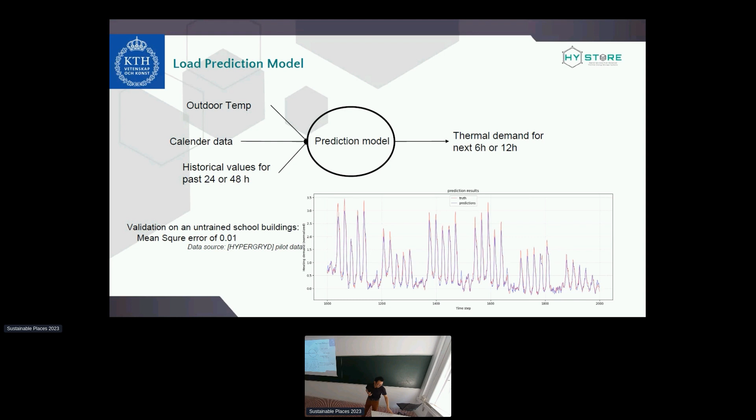Another challenge we've been facing is co-simulation, because a lot of research has been done on the heat pump itself, the thermal storage itself, and the building itself. But if you want to use any kind of data-driven method, you need a framework where all these components can talk to each other through an interoperable simulation environment. This has been challenging for us.

What we found as a solution is predicting the temporal trajectory of a set of dependent variables. This means putting different parameters from different components together and setting up a framework to let them run together in real time, to see if this interaction can really meet the supply and demand. The optimal control framework will be sent to our algorithm or controllers to make sure this is the best decision for operating the overall network.

In order to develop this co-simulation, interoperability is very important, because you may have different formats of data, different time series, different interfaces, and different heat pump manufacturers. So we are still struggling with this, but we are coming to see the light at the end of the tunnel.

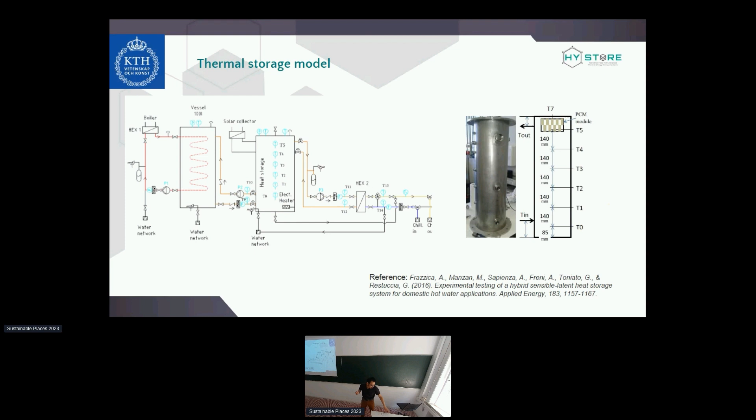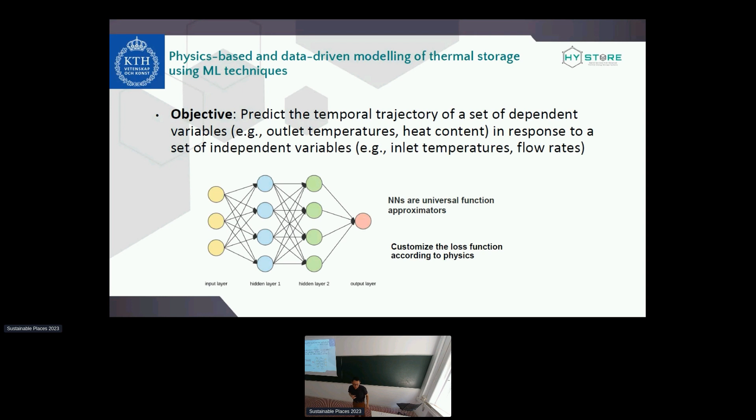Instead of modeling this conventionally, we use a PIM model—a physics-informed machine learning approach—in order to create more generalized data regardless of the dimension of the PCM storage, trying to scale up to see if this PIM model can really work at a bigger or smaller level. So basically, it's a physics-based data-driven model. You select limited parameters and see how the network trains in different layers to meet the real data, letting the model learn itself.

We have also done previous studies to see if there's good research evidence showing this will work with thermal storage networks. We concluded some advantages of this approach: instead of using pure machine learning, which requires high computing power—basically a supercomputer—using a PIM model is much easier. We can run it on our own PC because we already have the mathematical framework to define the boundary conditions. This makes it easier to reach consensus on the data, and you can combine different physical parameters with the data you're processing. So from a computational perspective, it's easier for us when doing the modeling work.

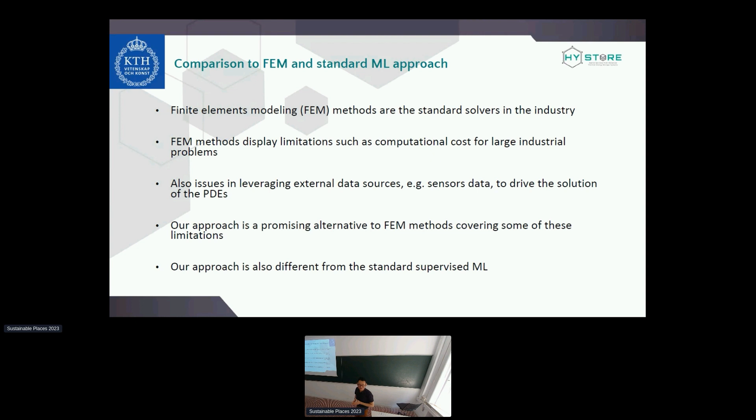So also a little bit of comparison we have done, using our method with other methods available in the research community. For example, comparing this with FEM, finite element modeling, similar to CFD modeling. You need to compute all the parameters, define the boundary conditions, or actually run the experiment to get the data. But we have found good motivations to continue with this research work because it promises an alternative way to predict thermal performance instead of the conventional way - experiments, numerical solutions, or a combination. This is an alternative that's easier for researchers in many ways.